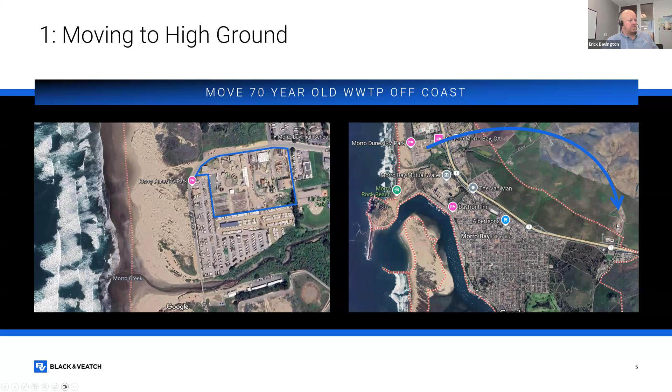It got moved about 2 miles inland to this pristine ranch land, grassy ranch land. What an absolutely beautiful site. That took it uphill, away from the flooding potential risk, but it also did make for a more complicated program. So this is the program elements for the Our Water program, as they called it.

The most expensive and largest component was the Water Resources Center. That's the scope that Black & Veatch and Filanc did as a joint venture under design build delivery method. There was another contract for the pipelines to bring the wastewater from the old plant up to the new plant, and then the effluent back to the outfall at the old plant. They're going to continue using the old outfall, and the injection well field, which is being built around the same area.

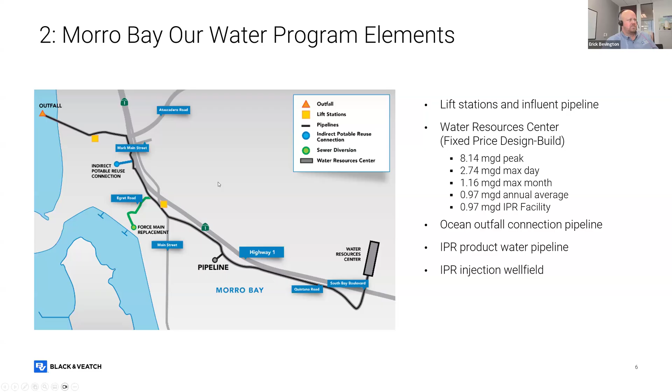Okay, so let's talk about the end product. It's a beautiful site, you'll see what I'm talking about in a second. It's actually two plants in one, so double the fun. And process diagrams can be moving.

So here's our beautiful plant site, without a doubt the prettiest wastewater plant site I've worked on. Usually they're in the worst part of town, surrounded by industrial parks. Our neighbors were cows and ranch land. It's absolutely beautiful, you can see the Pacific Ocean here in the background. There's Morro Rock, kind of a famous icon, and the power plant stacks, which are also an icon, which I understand they are going to take down.

This is the plant. It's kind of a long, sprawling plant, we'll talk about why in a bit. The wastewater component of the plant is up here, so you've got your headworks, your BNR and MBR, solids handling, and our safe filtration system. We'll tell you what that is in a minute.

And this portion of the plant is the indirect potable reuse portion of the plant. So here we've got the RO-UV-AOP system in this building, our calcite contactor tanks to buffer the water, our product water tank to chlorinate the water, and then our outfall pumping systems are here to pump either to the ocean or to the injection well field.

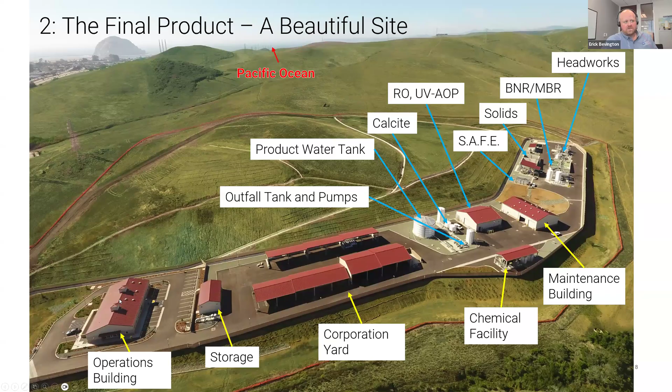These labels here are the various buildings on the site. They've got a maintenance building up here. All the chemicals are centralized out of a central chemical feed facility. In the middle is a corporation yard. They run their entire water and wastewater system out of this one facility now, so they've got all their equipment and stockpiles of rock and all that stuff here. Storage for flow meters and all those things in the operations building. They've relocated all of their water and wastewater staff to this building to run it out of here.

Okay, so we're going to do a flyover video. It's probably going to be a little jittery on your end due to screen share, but hopefully you'll get the sense of it. So here's the front of the plant, looking north. That's the operations building in the foreground. We match the kind of farm ranch style buildings in the area, so that's why they have this kind of red roof look to them.

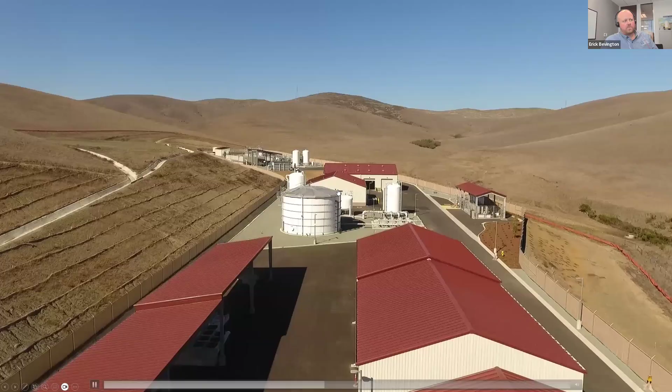Here's the corporation yard area in the middle of the plant. Behind it, you can see the product water storage tank, and the building directly behind that's where the RO and UV-AOP systems are. And here's our outfall pumping systems. Chemical facilities on the right there, maintenance building. At the back of the plant here is the wastewater treatment plant component of it.

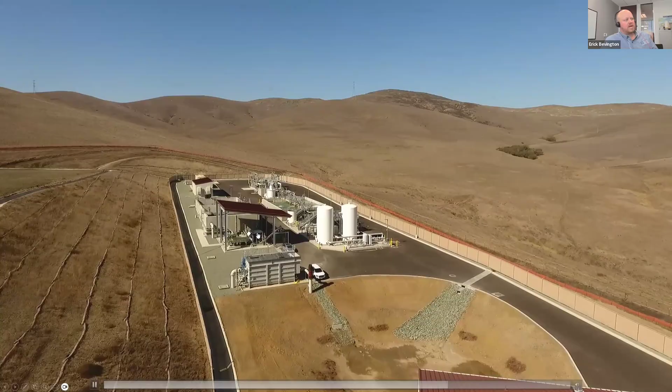In the foreground is that safe filter we're talking about. On the left here is solids handling. We're flying over the membrane bioreactor now and the BNR tanks. This was filmed during testing, so you can see the water is nice and not brown. And then headworks here at the top of the plant. Hopefully that showed up okay on your end.

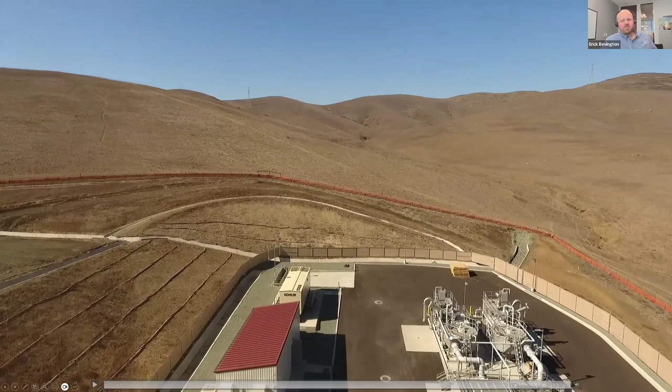Okay, so here's the two plants in one. The mainstream is a traditional wastewater treatment plant using membrane bioreactor technology, so it goes through biological nutrient removal with a membrane bioreactor on it. That's capped at 1.88 MGD, and that is one of our innovations that made this project feasible. You can see the peak hour flow is 8.14 MGD, so they have quite a large peaking factor due to a couple things.

One is infiltration. Some of their sewer lines are actually below sea level along the coast, so they get a lot of infiltration, especially in high sea events. And then also it's a huge tourism destination, so their population will greatly increase overnight on a holiday weekend, which also impacts these large peaking factors. The annual average is less than one, a little bit less than 0.97 MGD.

So that main wastewater process - BNR, MBR, outfall chlorine contactor - is then pumped to the existing ocean outfall a couple miles away. Any flows above 1.88 MGD are diverted to the safe filter system. It stands for Stormwater Adaptive Filtration Equipment. It was a marketing name for a system that's really just a cloth primary filtration filter. So that takes any of these peak flows, and that allowed a lot of cost savings, which we'll get into a bit. So that's the main stream.

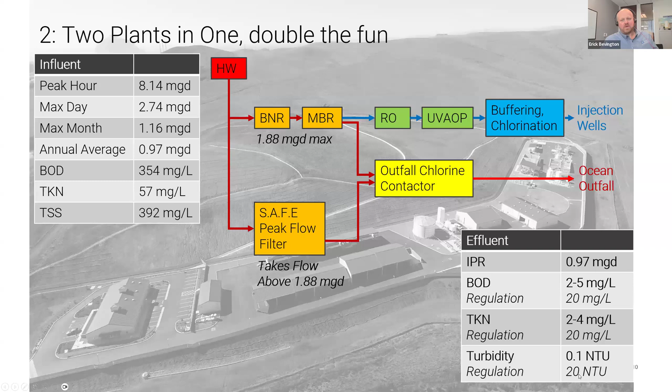So you can see it has really great performance, and that's the beauty of membrane bioreactor. I am a huge fan of these things now after this project. BOD coming off the membrane bioreactor main wastewater stream is 2 to 5 milligrams per liter, their regulation is 20. Total Kjeldahl nitrogen we're in the 2 to 4 range, regulation 20, and turbidity is at 0.1 NTU, down from the regulation of 20. So really a big improvement on the wastewater quality.

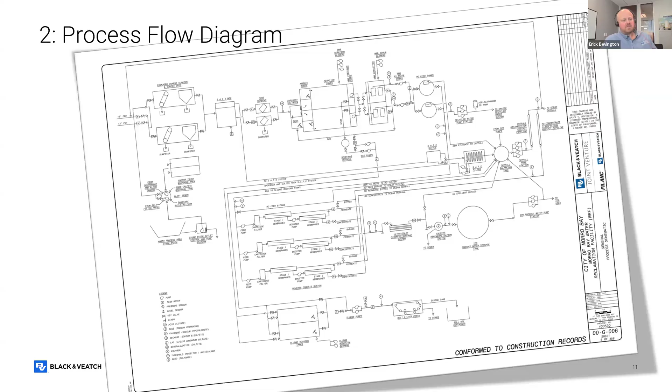Okay, so here's the process flow diagram out of our drawing set, but why have a boring process flow diagram when you can have a fun one? So this is our process flow diagram from our proposal, and we used it in our BDR as well.

You'll notice the cows, this is why it's moving. Cows were always on the site when we were there, and every time we went to check out the site at the beginning of the project, the cows would come over and check out what we were doing. So the cows made it into our proposal here.

You can see there's a lot going on, so I'm going to break this down into those two plants I'm talking about. This is the main wastewater process. You can see we've got at the headworks, coarse screens and grit removal, that's a package system. Here's the safe box, this is where flows above the 1.88 divert and go to the safe settle system and safe filtration system, followed up by fine screens into the biological nutrient reduction aeration basins, and then the membrane bioreactor.

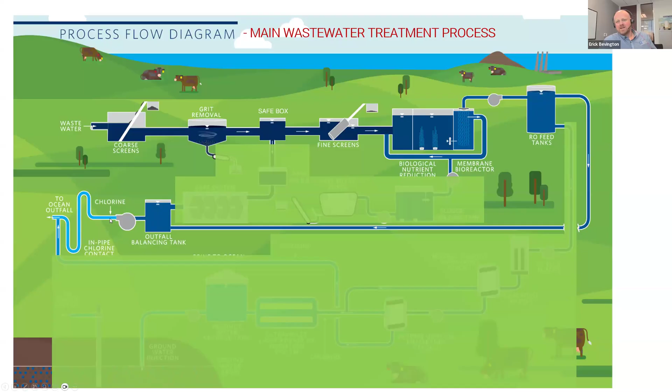That permeate then is pumped into the RO feed tanks. When those tanks fill up, anything not used by the IPR system overflows passively to the outfall balancing tank over here, and it is then pumped into the chlorine contact pipeline and then off site to the ocean outfall.

The IPR treatment process starts at the membrane bioreactor and those RO feed tanks. You can see here the pipe actually comes off the bottom, so the IPR system gets its choice, first pick of the water coming off the membrane bioreactor. Anything above what it takes just automatically diverts to the ocean. So we actually flow by gravity from the RO feed tanks to the high pressure RO feed pumps, and we put the cartridge filters downstream of the RO high pressure feed pumps. That's unique, that's not typically the way it's done. We'll get into why in a little bit. It's a two-stage RO system with an interstage booster for added control and energy savings.

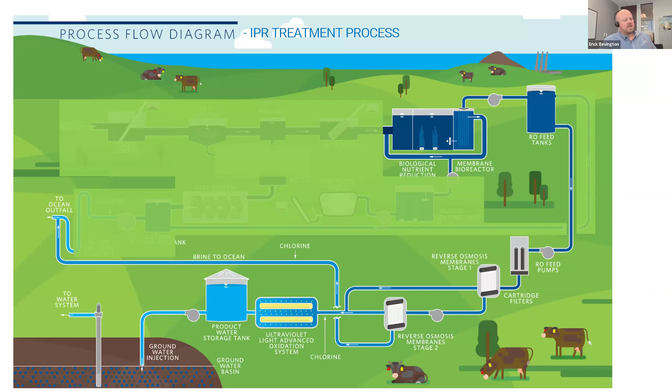And then after the RO, we go into UV AOP. It's ultraviolet advanced oxidation process using chlorine, sodium hypochlorite, which is also a bit of a divergence from the typical use of peroxide. From there, what we're missing on this diagram is the calcite contactor tanks, that's to add buffering into the water because ultra pure water is actually very aggressive and corrosive. And then the product water storage tank, where it gets a dose of chlorine to get some added log removal credits, and then it's pumped offsite to the injection well field.

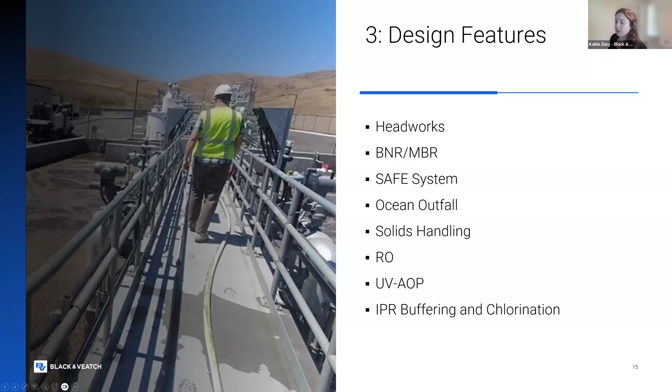Okay Kaitie. Thanks Erick. So now we're going to walk through a little more detail on the design features for each of these areas. Next slide please.

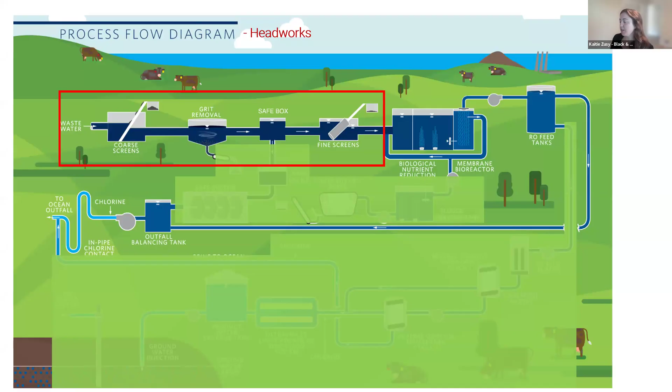So first of all, let's talk about the headworks. Erick already kind of mentioned, but we essentially have at the head of the plant some coarse screens, vortex grit removal, the safe box, and fine screens.

So over on the left here, and we have this for all of our drawing sets, we have this kind of 3D rendering before you dive into all the mechanical process sheets. It kind of helps you visualize what it really should look like rather than just looking at those 2D plan and section cuts on the drawings. So let's look at the bottom one, you see kind of those big gray units, those are the packaged headworks facility. The photo is actually up on the top right as well.

This headworks, each one can treat 8.14 million gallons a day, so we have a duty standby system. They have 1/4-inch bar screens and the vortex grit removal all built onto these skids. Erick's going to talk about the process and how we selected this unit, but one of the key drivers was that we determined from design through construction it would be more cost effective to have these skids delivered to the site rather than to do a pour in place concrete headworks.

And then also part of this area is the fine screen system. We've got 2 screens that treat up to 1.88 million gallons per day, again it's a duty standby, 1 millimeter openings. The key reason we have these fine screens is it's a requirement upstream of the membrane bioreactor to protect those membranes so you don't get any large materials or anything that can damage them.

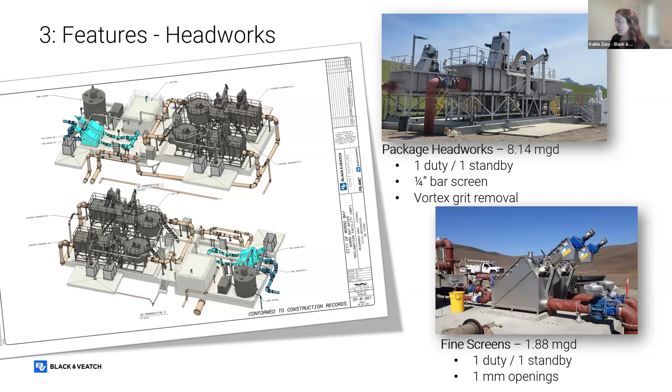Right, next we'll talk about the BNR and MBR system, so the aeration tanks. These are downstream of the fine screens. You'll see on that perspective view, the flow is actually fed into the head of those tanks from the fine screens. We've got 2 different trains, and each train has an anoxic zone followed by an aerobic zone.

It's designed so that during the summer months when flows are maybe slightly lower, you can take a train offline and do some maintenance work. But we have those 2 trains, and then from there it's pumped up into the MBR system.

The reason we're actually pumping into the MBR - I think more typically you'd go by gravity from the aeration tanks into the MBR cassettes - but the city wanted us to build in some equalization into the aeration basin. So there's actually 36,000 gallons of equalization volume in those basins. So if they get a slightly higher flow going into the BNR, they have a little buffer space to ride out some of those diurnal flows.

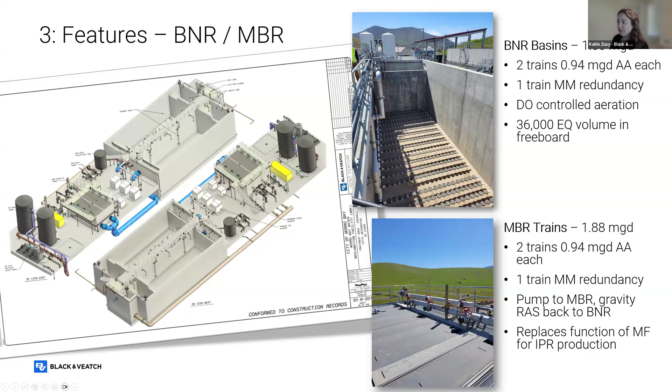We also have a bunch of other equipment laid out in this area. We've got the blowers for the aeration tanks, the air scour blowers for the MBR, and the WAS pumps. We also have a 3W system that the plant uses for their plant water and for irrigation purposes. So it's all kind of in this one area - oh, it's actually over here.

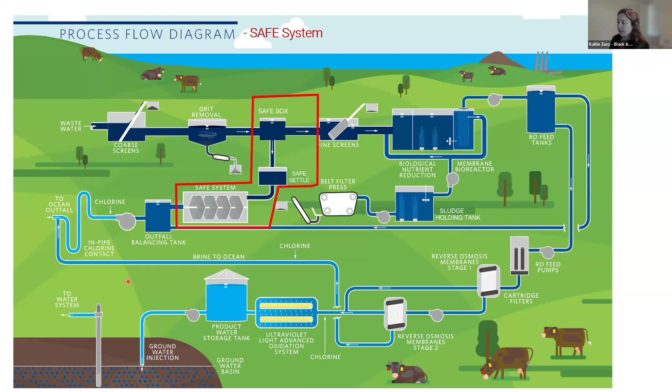All right, so the next piece, whatever isn't treated by the biological treatment system actually gets sent through a safe box to another tank, which we named the safe settling tank. It's kind of an equalization tank that will take any excess flow, and it can hold most of those events when we go above 1.88 million gallons per day. From there, it flows through to the safe filtration system.

Okay, so again we have our perspective view. This drawing has the solids handling and the filtration all in one area, but you can see on the far left that's our filter system - we've got photos of it on the right-hand side. This is just one system. This one unit treats up to 6.26 million gallons per day. We have one train, and again it's not used very often, so there's plenty of time to do maintenance during typical flow periods.

This filtration system actually produces a much higher quality effluent than typical primary clarifiers. The effluent from this filter, when it does get used, is sent to a tank that blends with the MBR effluent, and then it's disinfected and sent out to the ocean.

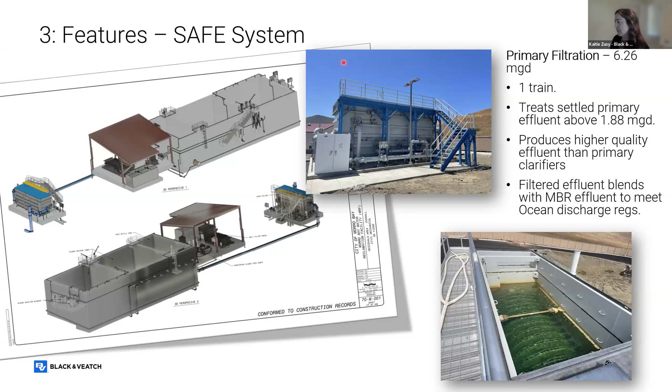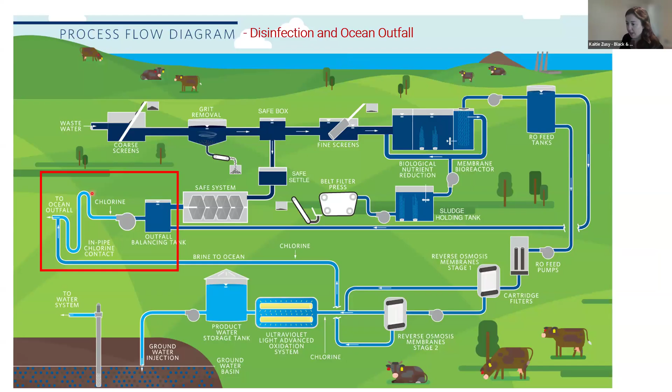Right, and then the last piece of that mainstream wastewater treatment plant is the disinfection and ocean outfall. I just mentioned the outfall tank where the filters and the MBR effluent combine. From there, we pump through a pipeline where we add sodium hypochlorite, and it goes through a contactor and out to the ocean.

All right, so here's some cool photos. Eric and I were talking about it this morning - I have a really cool photo of him standing in front of that huge pipe in the ground. Eric's really tall, and the pipe is taller than him. I should have added it in here.

But we have this whole long site that you saw from the fly-through. So rather than building a storage tank to get that chlorine contact time, we actually did a value engineering exercise very early on, before we even submitted our proposal, and determined that we wanted to use this pipeline. It's a 72-inch diameter pipe, and it has that contact time.

It also gets a much better baffling factor than a tank, so it's a more efficient use of space. And it travels through the site, and then from there it goes out to the ocean.

Right ahead of that chlorine contact pipeline, we have this outfall tank. We joke and call it the octopus tank - there's all these pipes crawling into it. That's the MBR effluent, the filter effluent.

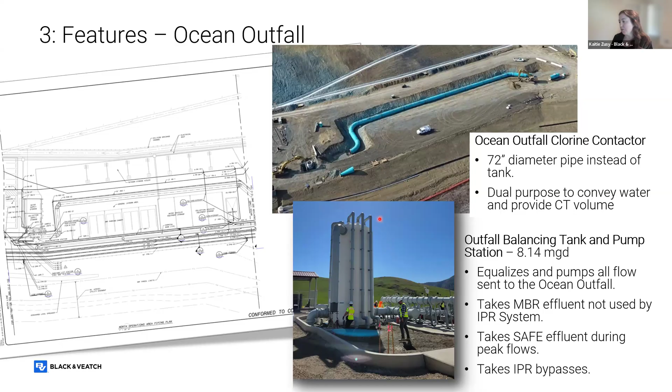Another thing we haven't talked about yet is all of the indirect potable reuse pipelines. So anything that needs to be diverted, if it's not meeting water quality standards, or anything during startup of the potable reuse system, those pipes all go into the same tank. Obviously the water is completely treated and high quality to meet the ocean discharge, so it goes in there, and then we pump and add the sodium hypochlorite, and it gets that disinfection through that long contactor.

The other piece of the main wastewater treatment process is the solids handling. Morro Bay is a very small facility, so they just send their waste activated sludge. They have a couple of sludge holding tanks with some coarse bubble diffusers, which gives them a lot of equalization volume, and from there they pump through to their belt filter press where they dewater the solids, and the solids are hauled off site.

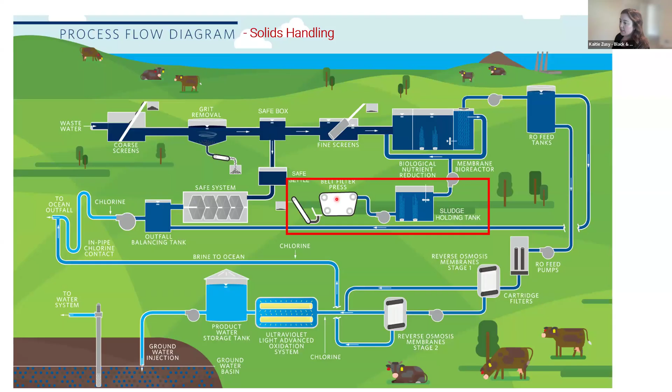So again, back to this same area, you'll see the big concrete tanks at the solids handling facility. They've got 2 of them, so likely they can operate one at a time while they clean the other. They'll fill that with their sludge, and they can cycle the air on and off. There's mixers in there just to keep it from going septic.

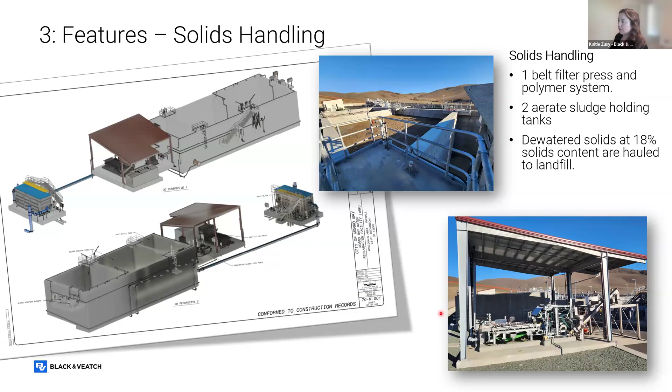We also have a large belt filter press - it's a 2-meter belt filter press. They only have 1 of them. The idea was that the city only wanted to operate it 2 days a week, so we set that up so they can keep their operations a little more minimal. The dewatered solids get down to 18%, and they get hauled off site to landfill.

All right, so the last piece of the puzzle is this indirect potable reuse treatment train. We already talked about it a little, but the membrane bioreactor is actually a key part of this. Typically upstream of the RO system, you have to have membrane filtration, so the MBR actually doubles for both purposes on this project.

From the RO feed tanks, water will flow by gravity out of the bottom of those tanks straight down to the RO system. Typically you'd have multiple different pumps to pump through cartridge filters and then the RO, but since we have this hilly site, we actually just have 1 pump station that feeds the MBR effluent through cartridge filters and straight through stage 1 of the RO. Then we pump through stage 2, and from there it goes through the UV-AOP system.

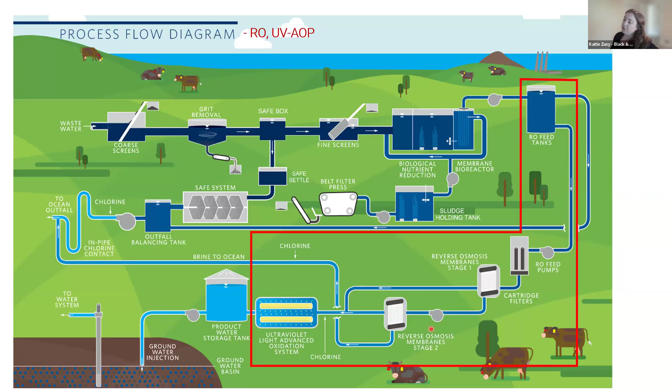We have 3 RO skids for a total of 0.97 million gallons per day. That number is actually what the City of Morro Bay wanted to be able to produce for their groundwater injection wells, so we sized the system to meet those numbers. Each train does about a third of a million gallons a day, and each train is 2-stage RO.

I already mentioned that it flows by gravity from the RO feed tanks straight to those pumps. There's a cartridge filter on the high pressure side of the pumps, and between each stage we've got a booster pump.

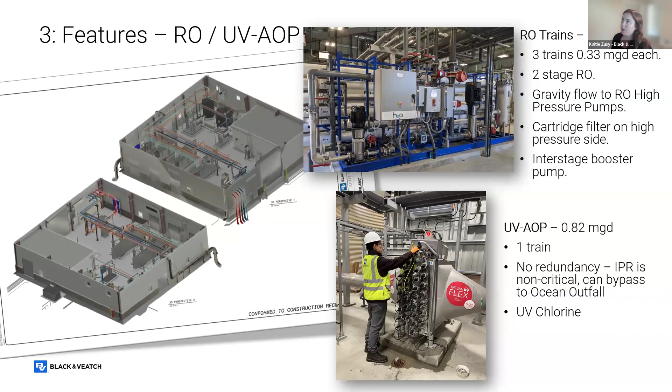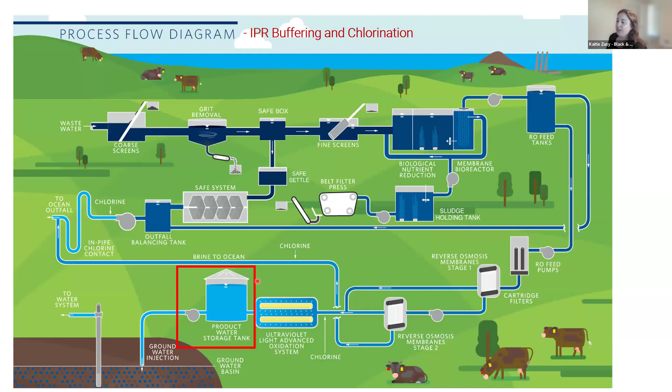One other unique thing is that we're using UV chlorine. The city did not want to have another chemical on site by doing peroxide, so we are using UV chlorine. Then after the IPR treatment train system, we've got the buffering and chlorination.

So in this area, we've got calcite contactors. We go straight from the UV-AOP system through the calcite contactors. There's 2 tanks, and it gives them about a 6-month media life. And those calcite chips really provide that buffer to help clean up the water so that it's not overly aggressive

when it goes through those pipelines and into the storage tank. Then we also have the product water storage tank. It's 200,000 gallons. Part of that tank is used for chlorine contact, and the other part is equalization volume.

For anyone familiar with indirect potable reuse, you need to have a certain log removal value for Giardia, Cryptosporidium, and virus. And so in order to meet those different removals, you sometimes will need to have a little bit of extra steps in there. So one of them is this chlorine contact. It gives the city a little more flexibility to help achieve that.

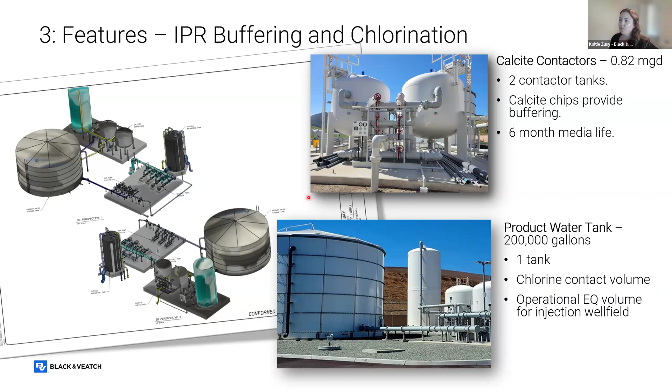All right, so with that, I'm going to hand it back to Eric to talk about the design, build, delivery method that we use for this project.

Okay, thanks. So like I mentioned earlier, this project was unique in that it was delivered by fixed price design build. I'll get into a little bit about what that means and how that compares to a traditional design bid build delivery method that everyone's probably familiar with. I'll show you the project schedule and how that compares to a traditional design bid build delivery method.

We had 10 weeks to design an $80 million super complicated plant. So I'll show you what that looked like.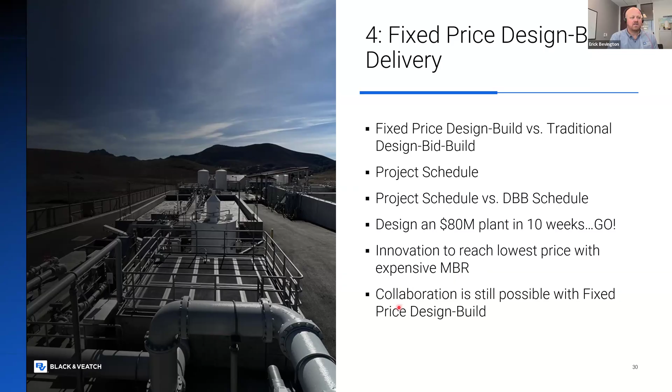I'll walk you through some of the innovations we came up with to reach the lowest price, even though we had the most expensive process by putting in an MBR, and were still able to win the bid with the lowest price with that expensive process. And I'll show you that collaboration is actually still possible with fixed price design build.

Okay, so for those who aren't familiar with these delivery methods, on the left is a traditional delivery method contracting structure, which also applies to CMAR or CMGC. The owner holds contracts with the engineer and the contractor separately. And that means coordination between those two parties has to go through the owner, and through Spearin Doctrine, the scope and gap risk is held by the owner.

So if the engineer misses something on the drawing, the owner is on the hook to pay for the contractor to add it, and vice versa. So that is the kind of traditional structure. CMAR and CMGC, which really are the same thing, modify that a little bit by bringing the contractor on early and having some coordination directly between the two of them, but contractually it's still the same general structure.

Design build is different, where the owner holds a contract with a single design build entity. That entity has the engineer and contractor within it. That can be a joint venture, like in this case, we were in a joint venture with Filanc. Or that can be a single entity that does both - Black & Veatch is one of the companies capable of doing that, along with others. Or that can be a prime-sub arrangement where either the engineer or the contractor is the prime.

Here, the main difference is the scope and gap risk gets moved into the design build entity. So it's a lot more risk control for the owner. These bars show the difference relative to design bid build traditional delivery - that's kind of the middle of these bars on how the different levers apply with this fixed price design build delivery method.

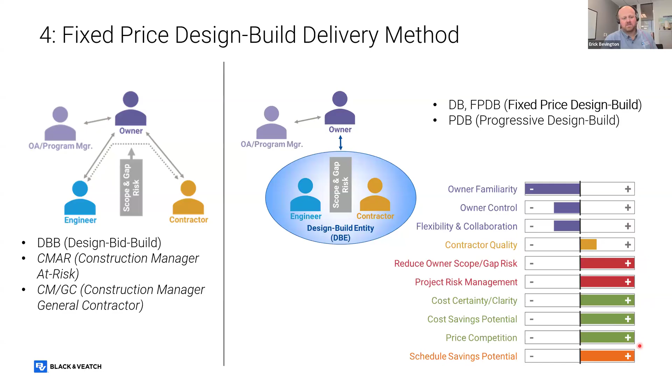You can see the key owner benefits and reasons why they would choose this, and the reasons why Morro Bay chose it: better risk control, better cost certainty and clarity, and maximized potential for cost savings. And that really was a big deal for them. Morro Bay is not a big city - it's only 10,000 people paying for an $80 million plant, plus a couple hundred million dollars worth of pipeline and other work. So they really took on a big project here.

This is the schedule for the delivery of the project. The SOQ was issued, I think it was Q3 of 2017. The shortlisted firms were invited to submit a fixed price proposal. A lot goes into that - I'll show you what that is.

And then when the project kicked off, I believe it was October of '18, we went from 30% to IFC design, which is issued for construction - that's the 100% design set. And then construction phase was a little over 2 years. The gap here was actually due to a site access restriction with the land purchase that was going on between the city and the rancher. That's why there's a little bit of a gap there.

Then into startup, permitting, and the IPR startup. You can see here storm - I'll tell you what the storm is about later.

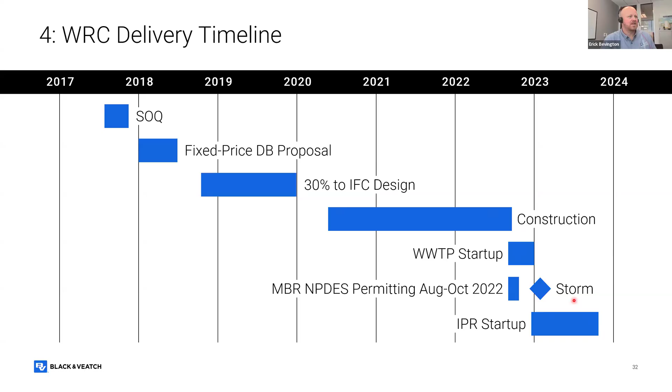So this is how the schedule compares to what it would have been with a traditional delivery. Key benefit of design-build is it allows you to compress the schedule. This probably pulled the schedule back about 9 to 12 months, because a lot of the design is moved up into the procurement phase with that proposal. It's also streamlined and allows you to overlap design and procurement activities, which we did since we were procuring equipment even while still in design. That's the reason for the difference.

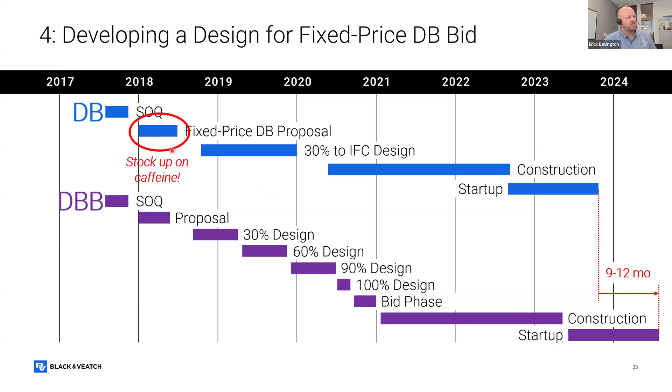Here's that 'stock up on your caffeine' fixed price design-build proposal - I'll expand and show you what that looked like. That bar was about 5 months, from November of '17 to June of '18. The RFP was issued January 11th of 2018, and the bid was due May 18th of 2018, if I recall correctly. We actually started work before that, and you really have to on these things - there's just not enough time in those 5 months to do everything needed on a fixed price bid, because this is a binding bid. They could say, you're hired, build it, here's the check, call us when you're done, and that's it.

So we started, probably in October, with process designs and ideas. This is where we germinated the idea of the safe filter system and some other ideas. We had a workshop where we vetted through those and figured out which ones to carry forward. Then we did alternatives design pre-work. We didn't know exactly what they were going to ask for - we had an idea, but we had to do all this in kind of a guessing state.

Then the RFP was issued, and now we knew exactly what we were responding to. They gave us a technical requirements document that had what they were looking for, level of quality, what kind of features they wanted, and we were able to adjust our approach.

So we had a little under a month to prepare for a design charrette, and this charrette was a very expensive and very productive meeting. There were about 50 people in the room for 3 days, representing executive management of both companies, cost estimators, procurement, design, construction, finance, administration - all of it. Everyone was in the room.

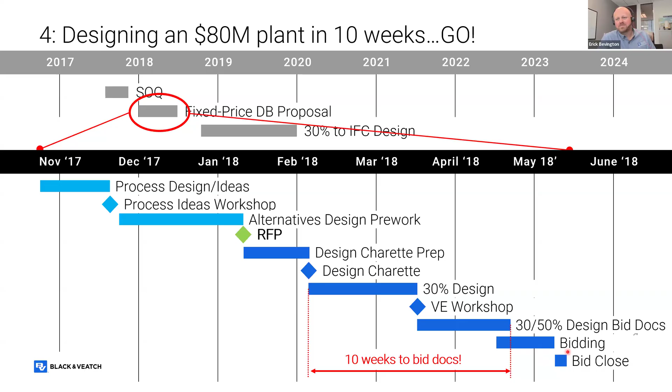It was the hardest thing I've done in my career, also the funnest thing I've done in my career. It was kind of like those college projects where you're up all night with your team and you think this sucks, and then you remember later that it was actually super fun. It's like that, but you actually get paid for it this time.

Okay, so this is how we came up with giving them a membrane bioreactor. Our big, hairy, audacious goal was to give them an MBR for less than an SBR price, because we knew SBR was really the only way to win this on a low-cost basis unless you did something very different.

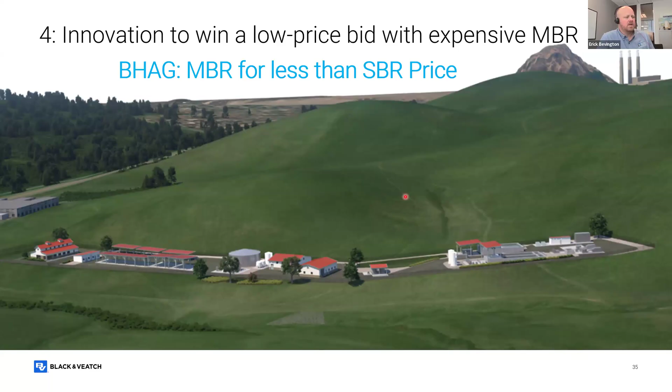So the big cost saver was the SAFE system. That saved about $7 million. Where that savings came in was not building a large flow equalization basin ahead of the plant, along with other components. So that saved about $7 million.

Another big savings was surfing the site. Photos don't really do it justice. These are big hills, and this plant is built on the side of basically a mountain. A traditional approach would have had a rectangular plant layout like we've all seen, and a lot of excavation work, huge retaining walls. We calculated it would be about 100,000 cubic yards of soil export we would have to do. So we came up with instead actually surfing the site.

That's why the plant's all strung out in this long line following the contours of the existing site, and we use the site fall on that surf down the hill to drive the flow. So you can see the slope here where we moved the flow between the processes by gravity rather than pumping.

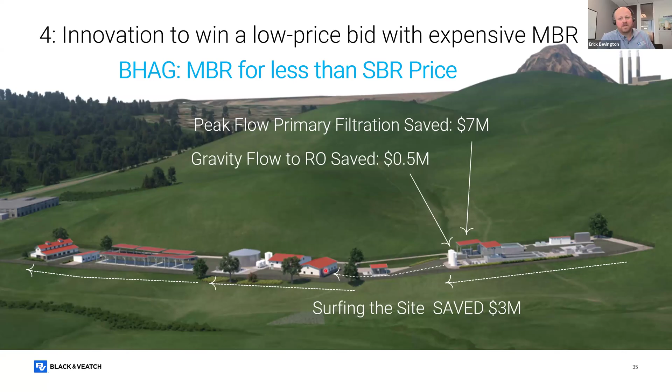There's these pumps that Katie was talking about. We eliminated the low pressure transfer pumps you usually have to feed through the cartridge filters into the RO high pressure pumps. We ran by gravity. I'll tell you, that was the hydraulic calculation I was most terrified of. Poor Katie had to prove to me like 6 times that it was okay, because you can turn a pump up, you can replace a pump with a bigger pump. You can't turn gravity up, but it works, fortunately.

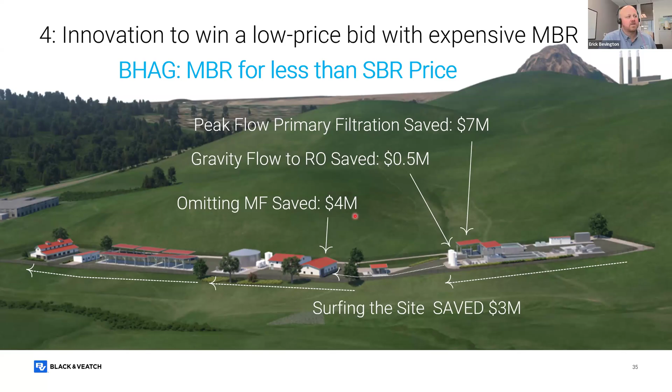And then omitting microfiltration by using the membrane bioreactor to do double duty saved another $4 million. This was the first mainline wastewater plant in California to be permitted for that. There's another plant that's a scalping plant that also does the same thing, that was slightly ahead of us on the permit, but this is the first actual mainline wastewater plant that does it.

Okay, all right, we're doing okay on time.

Collaboration is actually possible with fixed price design build if you select the right team and if you make it clear that's what you want to do. We knew Morro Bay wanted collaboration. They wanted the fixed price because they needed that cost certainty. They needed the lowest price possible, but they also wanted collaboration. They wanted to have input.

So we ran the actual 30%. This 30% was the bid set to issue for construction. We ran that like a typical design phase with the 60% submittal, 90% submittal, IFC, all the design meetings where we go through the pump station, all that stuff.

The key difference is any options they wanted to look at or changes, we were able to come to them with the actual real cost impact of that and the actual schedule impact, whether it was an add or a deduct or if it was a wash. So they could make decisions on what they want to do with real numbers in mind.

They could decide if they wanted to spend that $300,000 on centralizing the chemical facility. That was one of the decisions they made. Or if that $300,000 would be better spent somewhere else on something else that meant more to them and added more value to them. So it's a really good process.

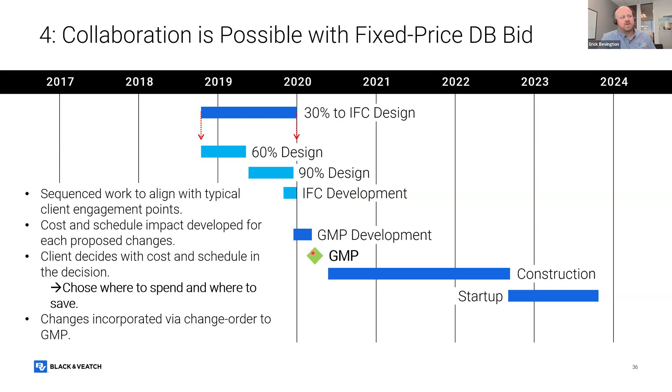After that was done, then we updated the GMP, guaranteed maximum price. So basically we adjusted our fixed price bid to everything, incorporating all the changes, and then started construction.

Okay, current operations. The plant now, the wastewater portion of the plant has been in operation for 3 years. I think 3 years, like last week, is when we seeded the plant and started operation.

They have had no discharge violations from the first minute of startup, and for a biological wastewater treatment plant, that is pretty rare. We're really proud of that. That is another testament to the strength of membrane bioreactor technology. It really can do wonders for you.

The IPR injection well field is under construction. I think it's going to be completed in 2026, mid 2026, and they'll start injecting into the aquifer at that point. Currently, they're running the IPR system, but they're taking the product water and just putting it in the ocean outfall, sending it off to the ocean. That's to keep all the equipment exercised and keep the operators current on operations.

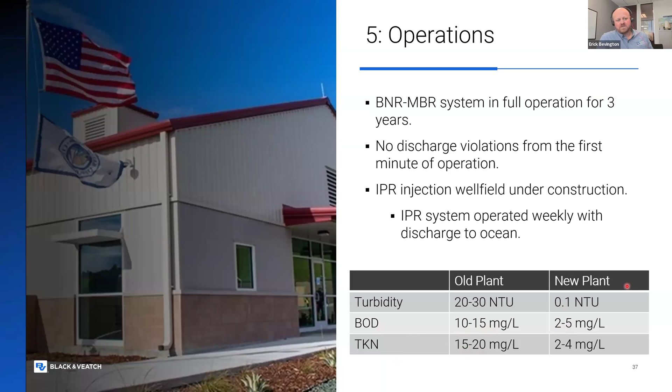Here's a comparison of the old plant versus the new plant. Old plant was a 47-year-old trickling filter. Turbidity coming off the old plant typically ranged between 20 and 30 NTU, sometimes higher. New plant, 0.1. BOD coming off the old plant was 10 to 15 milligrams per liter, often exceeding their permit of 20. New plant between 2 and 5. Total nitrogen, same thing, 15 to 20 or so coming off the old plant, sometimes higher, and they had discharge violations. New plant is in the 2 to 4 range. So significantly better water quality being sent to the ocean outfall.

Well, sometimes someday becomes today. This plant was built to prevent the risk of someday in the far future, the old plant being flooded. Well, that far future turned out to be only 3 months after we started up the plant. On January 10th, 2023, they were hit with a 500+ year storm event.

It was a state of emergency. Highway 1 was flooded under about 6 feet of water. No one could get out of the plant site. Everyone was trapped there for a couple days.

And this is what the old plant looked like. The old plant was flooded about 3 feet deep with mud and water. You can see this door here, the water line is about halfway up. This is a couple days later, after the water drained off.

It destroyed all of their electrical equipment and most of their mechanical process equipment. These are the intake screens, you can barely see the top of them poking out of the water. This must be a sample sink or something bobbing on the surface.

If they had still been dependent on this plant, they would have had to discharge raw wastewater to the ocean for months, if not over a year, to get all this fixed. This was right after COVID, so equipment supply was a real issue. They would have been in a real world of hurt.

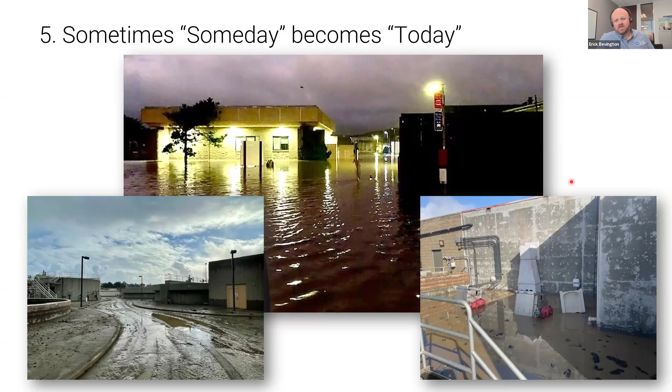So kudos to Morro Bay for having the foresight to do this and get ahead of it. And boy, they were lucky. They got 3 months ahead of it.

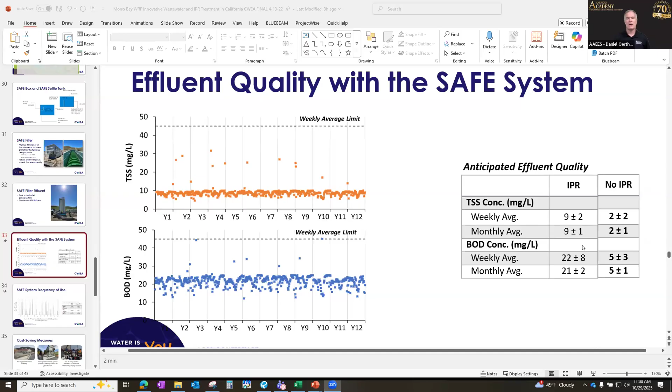Got it, no, thank you—appreciate that. Yeah, they were having several violations a year at the old plant.

And then, you mentioned the I&I and the saltwater intrusion—how about that, on the collection side? How does your biological system handle it when it gets hit with salt every so often?

For the most part it really hasn't been an issue because it's diluted with a lot of stormwater. Usually when sea level is super high, it's during a storm event, so you're also getting a lot of rainwater blended in. So salt really hasn't been a problem.

The problem was flow. In that storm event, the plant was designed for 8.14 MGD, but it saw, I think, over 10 or 12 MGD coming at it. It was designed for total suspended solids of around 250, but we had well over 1,000—it was liquid mud coming into the plant, and it still met discharge permit, which I'm super proud of. And it was only 3 months old at the time.

That pipeline—their main street, right there on the bay—is the one they think they get the most infiltration from. But if they tear it up, they also lose their main income source, so it's kind of a catch-22. They're doing projects to try to reduce I&I, but that's an ongoing thing they're working on as well.

Awesome. Now we're going to move on to a few questions that focus on some unit operations.

Katie, thanks for joining us. Erick, we're going to put you in the hot seat. Bye, Katie. Okay, so a number of these questions came in specific from folks, so I'm not necessarily going to put them on the spot—I'm just going to read their questions so you're able to handle it.